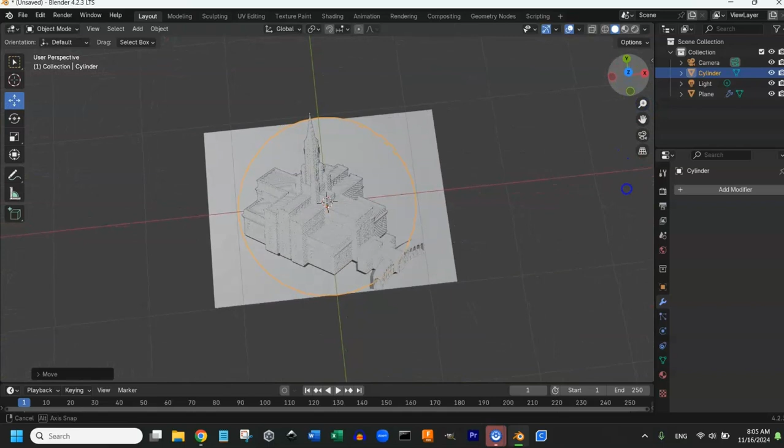Now obviously it doesn't encompass the entire temple yet, so we're going to stretch it. Encompasses the entire temple, and we're going to position it, poking out. Okay, so I have it right on the edge there. If you look, the temple is completely

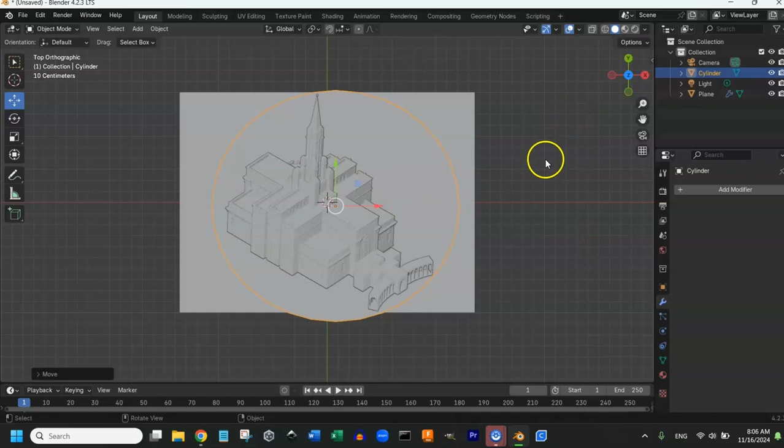surrounded by the cylinder. We are going to combine these two, so with the cylinder selected, we're going to add a modifier, generate Boolean, do a union with an object, click on this little square, choose our plane.

It'll take a while. You can see down here, just faintly, there's some thinking going on. Alright, so it's done the union. Now we need to make sure that we apply. Okay. Now, if we move, we can see this is all nice, one piece.

Put it back where it was. So we don't need the plane anymore, so we're going to go ahead and delete the plane. Alright, so now we have our magnet.

Now we have this extra plane sticking out here. We don't really want that, so we're going to cut that off. To do that, we're going to add a cube.

We're going to make sure it encompasses the entire plane, and we're going to position it so it's just barely covering the plane.

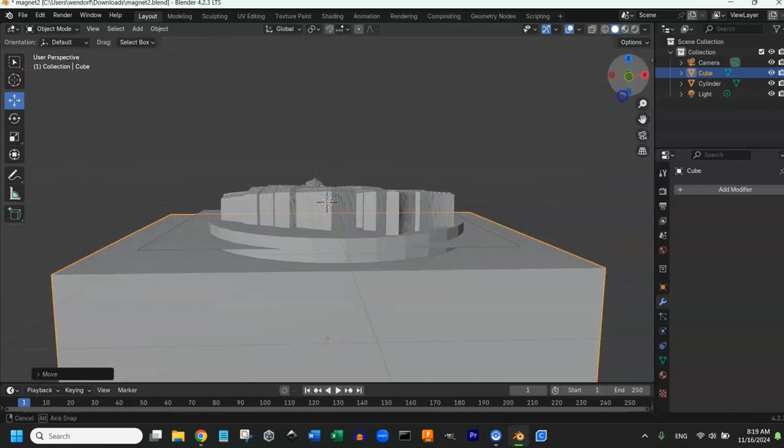And we're going to take our cylinder, add modifier, Boolean. This time we're doing difference. For our object, we're going to use the cube. So we're going to do difference with the cube, exact.

We're going to apply. So now if I hide the cube, we can see we get rid of that plane there. So we're going to go ahead, we don't need the cube anymore. We're going to delete it.

Now, that's a little thinner than I wanted. So I'm going to choose face select. Select this face. We're going to extrude.

Make sure we're extruding the right amount. That was pretty good. Then we're going to go back into object mode. Okay, so now we have that.

So the last thing we're going to do is put an inset in the back for the magnet to go in. So we're going to add another cylinder. We're going to shrink it to position it high.

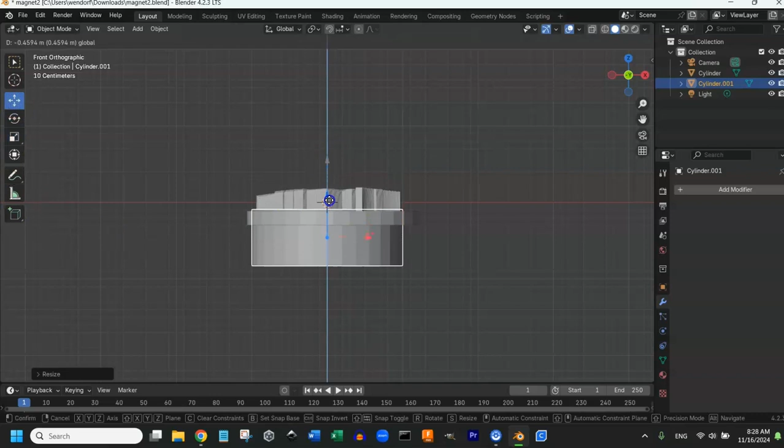We want it about halfway in there, and then we want to make sure that it's centered. That's a little too tall, so we're going to shrink that. Position it. That's pretty good. It doesn't have to be perfect.

Okay, so now we're going to select our original cylinder again. We're going to add a modifier, generate Boolean, and do a difference.

Object is going to be the other cylinder. Then we are going to apply. Alright, and now if we look, if we hide this cylinder, we'll see we have a nice little inset in there.

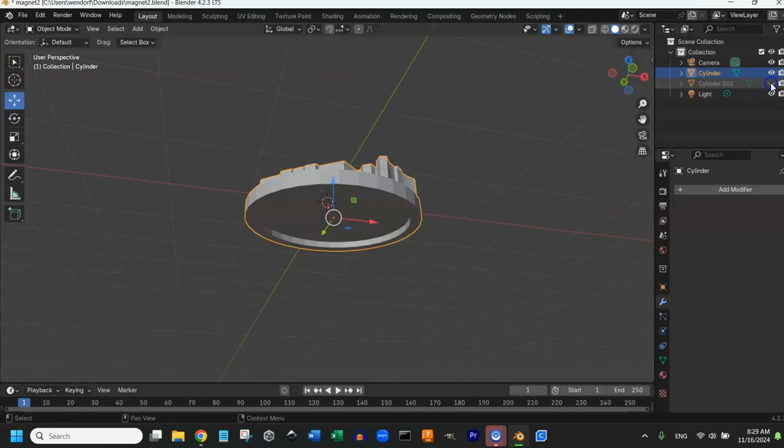So we're going to delete that cylinder. We don't need that anymore. So now it's finished. Our model is finished.

We got the temple. It's in 3D. It's on the back, we got a hole for the magnet. So we're going to save.

We're going to go to export as STL. Call it magnet 2, so export STL. Then we're going to open Cura.

In Cura, we're going to open the STL we just generated. Control A to select it all. It's really small. That's okay. We're going to do this.

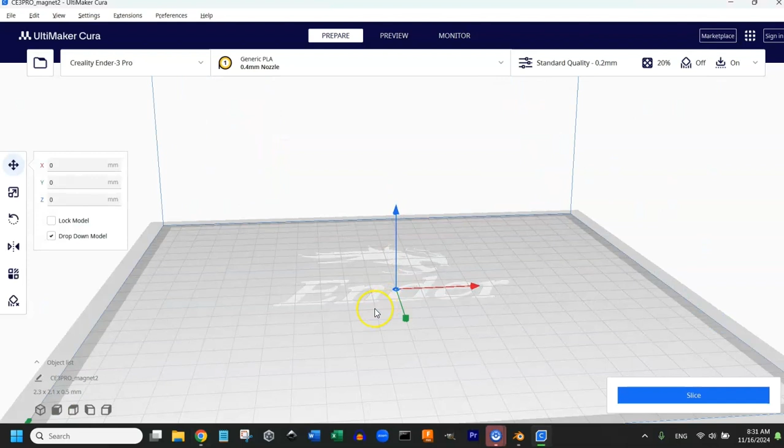We're going to do it on the Y. We want it to be 2.5 inches, which is 63.5 millimeters.

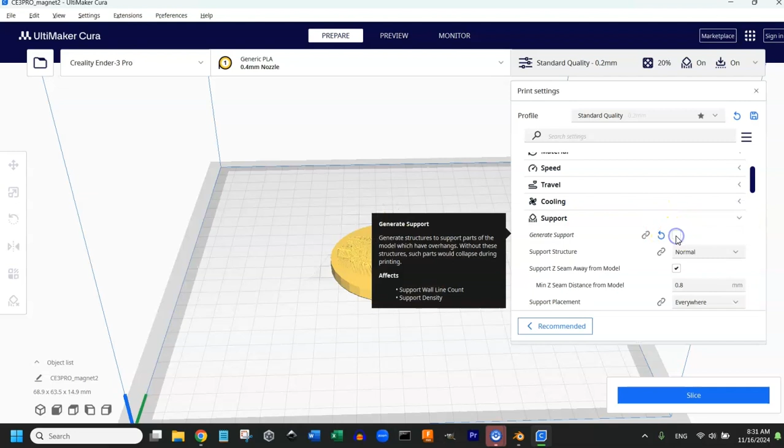Alright, it's looking good. Since we have that inset, we are going to generate supports. So generate support, we'll just leave it at normal. And I also always do build plate adhesion.

We're going to do a raft at 5 millimeters. Then we're going to slice. And if we preview, we're going to make sure that it's doing the inside properly.

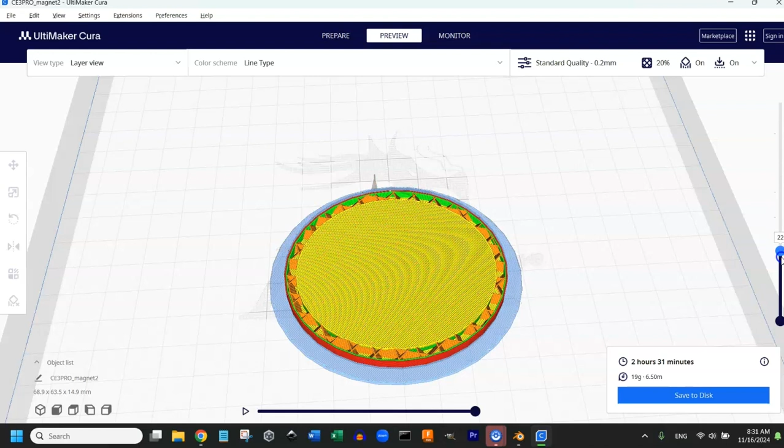We can see that it's doing the inside fill without any interruptions or anything, and it is generating supports. So we're going to save to removable disk.

Eject. Alright, so here's the finished product. You can see it's got the nice shape of the temple there. It's in 3 dimensions. It's a little rough.

If anybody has any suggestions on how to do that smoother, I'd love to hear it. On the back, we can see we have the nice inset for the magnet. I hope this has been helpful and that you enjoy making your fridge magnets.